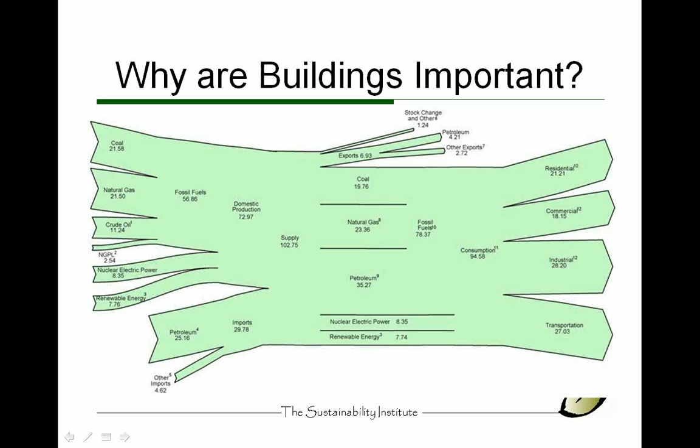So this screen here that you're looking at is how we use our energy in the United States. I'm going to bring it a little more local and talk about South Carolina.

You're probably not surprised to hear that South Carolina is one of the highest consumption of energy users in the entire U.S. We actually rank 17th in the nation for per capita energy use.

Now that means 33 other states in the Union are less wasteful than we are as South Carolinians. Now as South Carolinians, I mean that a North Carolinian uses less energy than you do.

So the idea is how can we effectively use that energy and redirect it into something that's a little more important. Ideally it would be our homes and families.

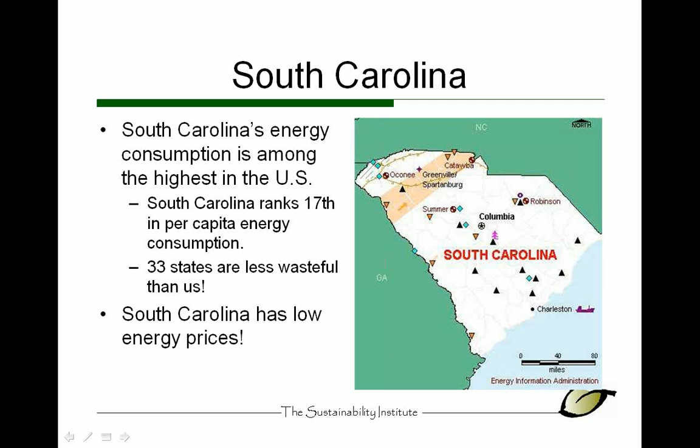Most people are surprised to hear that South Carolina actually has some of the lowest energy prices in the country. Think about it in your own home. How many of you feel like your energy bill is low? In truth, in South Carolina, our electricity costs are about a full cent lower than the national average.

What that means is if our local utility providers decided that they wanted to just bring our cost of energy to the national average, we could each add about $70 to our energy bill. So in South Carolina, we're on a precipice. We've got a couple of decisions that we should make now. We want to focus on energy now while it's cheap and easy, because if we wait, we may not have the money to invest.

This is one of those things that is a central theme in everything that our Sustainability Institute does.

Now I'm going to get on my soapbox here, and I typically don't stay on it for more than a few minutes. But one of the things we've been told is that there are 2 new nuclear reactors slated to come online in South Carolina by 2016. Now, I have a master's degree, and the only job I can get at a nuclear reactor is probably sweeping the floor. So one of the things we want to do is really jumpstart a green economy. And the idea is pretty simple.

If you give me the same amount of money and responsibility for the same number of households, I'll remove the need for the power plant. And I'll do it by putting hundreds and thousands of people back to work. Everyone from contractors who can do the work to realtors who can sell the work, to architects, engineers, all the people rolled up in selling and buying a home. There's a lot of money to be made, and there's a lot of progress to be made, specifically targeting the energy industry.

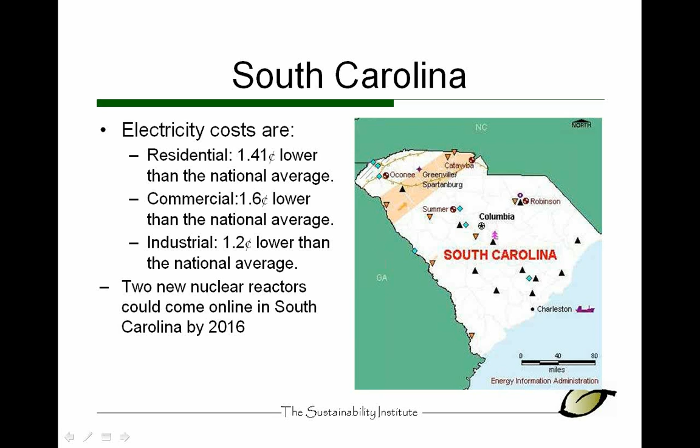So as we progress further, we've started with talking about the United States and how we use energy. We understand the situation that we're in in South Carolina, and I want to bring it home and maybe use your own home as an example here.

Now again, there's water heating and lighting and electronics and refrigeration. All of these are very important things, but you want to make sure you can maximize your budget. The idea is that no one has an unlimited budget. Incidentally, if you do find somebody with an unlimited budget, if you could give them my business card, I sure would appreciate it.

So in the grand scheme of things, when we target HVAC, we're not really targeting replacing HVAC systems. The idea behind this mantra is a house that is well sealed and well insulated is easier to heat and cool. And what I find is that a lot of homeowners don't target these improvements. They get swept under the rug because they don't truly appreciate how important they are.

So one of the things I'm going to talk to you today about is how do we create an infrastructure around those decisions? How do we make these decisions easier for the homeowner, and how can we help you if a homeowner asks you for these things?

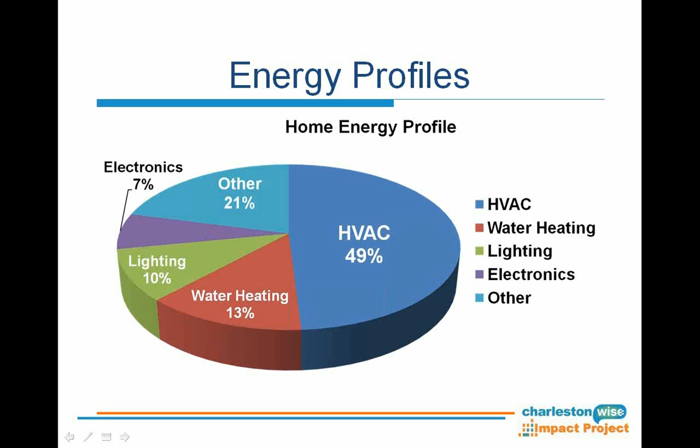We purchased the house from a family who was struggling. And so we bought the house and we realized what we had purchased. We had pretty much every problem imaginable.

Now, ideally, our customers wouldn't really be struggling with every single one of these, but we got the idea that we were going to take these problems, show the best opportunities for making these improvements, and then we turned this into our demonstration facility so that anyone who's struggling with any one of these problems can come to us. We can show them how to fix it and get them together with professionals that are specifically designed to help with those issues. So we're acting as a resource to the community.

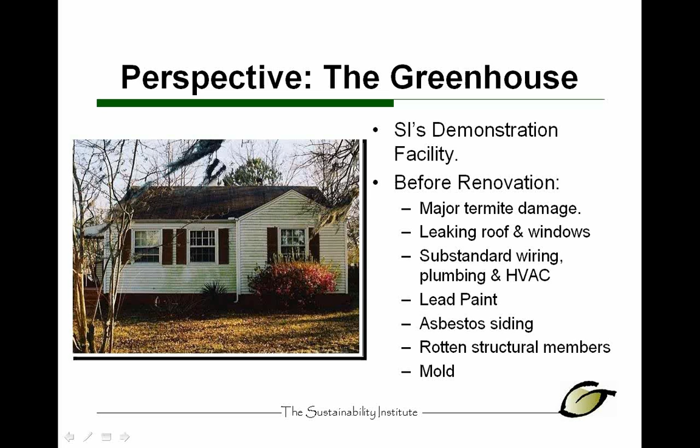Just as an aside, the house, as we finished with it, is not struggling with energy bills anymore. The family that lived there before us had energy bills around $270 a month, which I would love to be able to tell you is abnormal, especially for a house like this. This particular house is only 800 square feet, but because of those problems, that family was really hurting, and we needed to figure out a way to get the energy bills from what they were to what they are now.

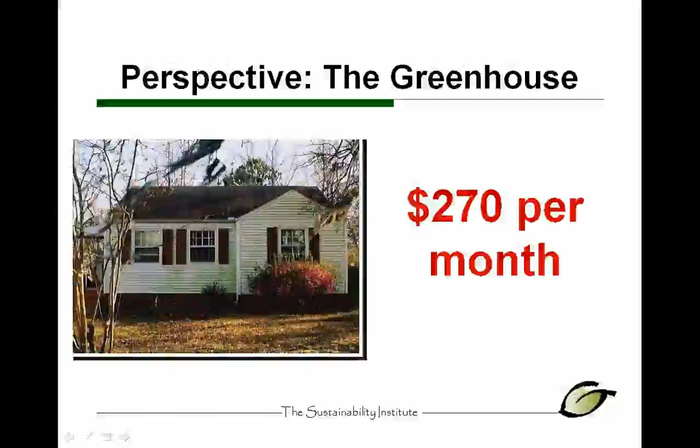As of 2003, we did a renovation, and that renovation, we had to create a scope of work that we could expect any contractor to achieve. Based on that scope of work, which is simple, cheap, and easy things, we were able to cut our energy bills and recreate the house to look a lot more manageable. Since that time, we've never had a bill over 70. So in the grand scheme of things, what we're talking about here is $200 a month worth of energy savings with a simple and practical renovation.

All we did was focus on what we call the building envelope, or the exterior shell. Now, the nice part about this process is it's a while-you're-in-there approach. In many cases, the clients that you're going to talk to, you're going to walk them through a house and you're going to show them the potential of that house.

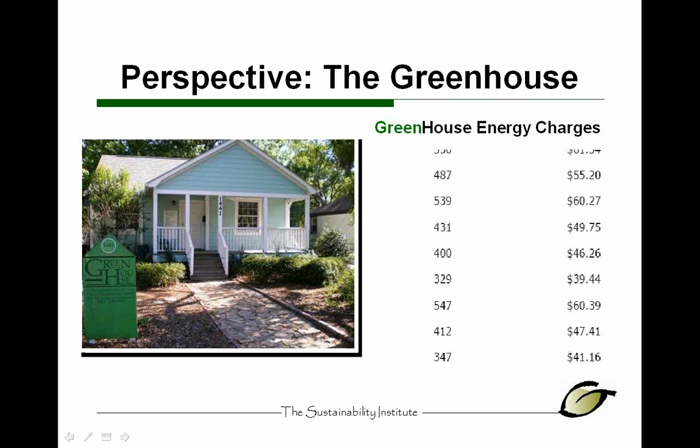You're going to know before anyone if they have plans to repaint the interior, to redo a kitchen, to redo a bathroom. One of the things that we want to be able to assist you with is, while they're in there, let's cut their energy bills in half. So I'll give you a couple of ideas about what we're talking about.

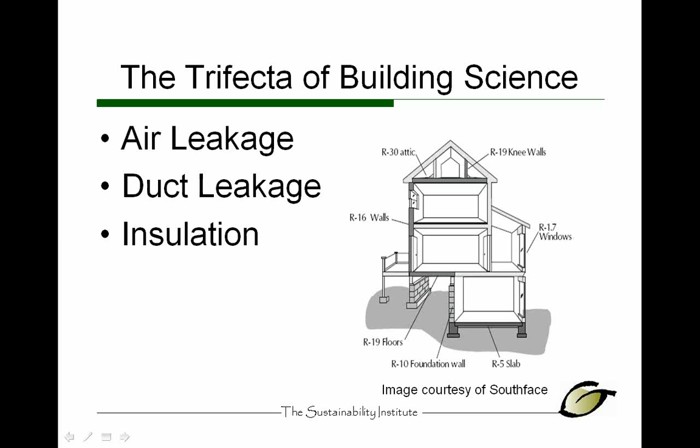As part of this process, we're really focused on what I call the trifecta of building science: air leakage, leakage in the ductwork, and insulation. All three of these things comprise how much money we're going to spend on heating and cooling. You add in whatever efficiency of HVAC system you want, but ultimately the amount of heat that's lost from the house is going to be equal to the amount of energy that you're going to expend trying to keep the occupants comfortable.

One of the things that we're targeting is the attic hatch. One of the things that we think about when we talk about air sealing is, where are the large holes? This is one of those locations that is undoubtedly the largest hole in any house, specifically because it goes unnoticed. It's not perceived as a hole, it's a door. Every house that I go into, this particular attic hatch is a pull-down stair, and I typically find it in a central hallway. Usually when I look up at it, there's a little gap where that string is that is open to the attic. So one of the problems is, let's consider where this is located.

If this is located in a central hallway, what else is located in that central hallway? More often than not, you find a central return, and right over top of that central return is a thermostat. So it's actually a misnomer that heat rises. Heat will actually flow in any direction. The direction that it's going to flow is from the hot areas to the cold areas.

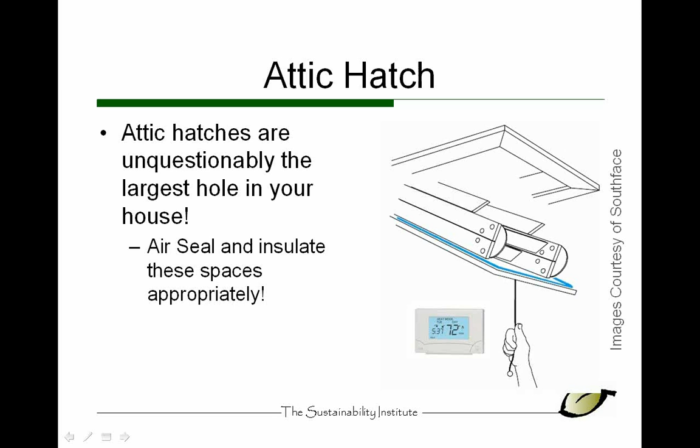If it's 150 degrees in a Charleston attic, that heat's going to want to flow down. And if that attic hatch is not air sealed and insulated, it's going to flow down through that attic hatch at much greater rates. Then what's going to happen is that heat's going to come into contact with the thermostat and trick it into activating unnecessarily. So even though the rest of the house may be perfectly comfortable, because there's a lot of leakage through that attic hatch, your energy bills go up. So it's as simple as air sealing, and in this case we're just talking about some simple weather stripping. But on top of that, you can very easily create a cover box that goes along with this.

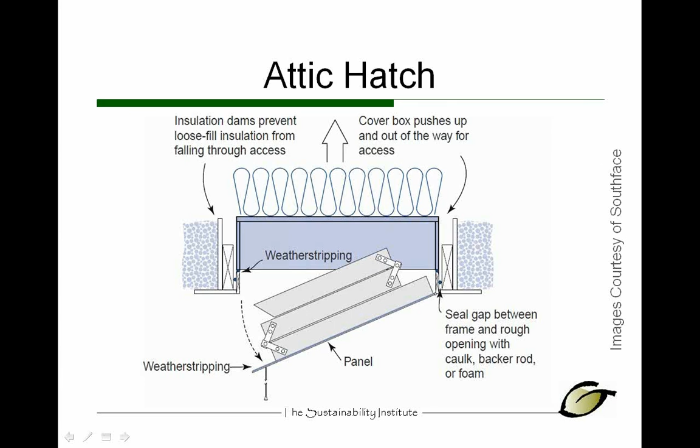By insulating and air sealing that, it's one of the quickest and easiest ways to drop your energy bills, and it's directly related to how much your energy bill will be associated with HVAC systems. You can do this simply by creating a cover box. What I recommend is hiring a contractor, but a handy homeowner could make this happen in a short period of time.

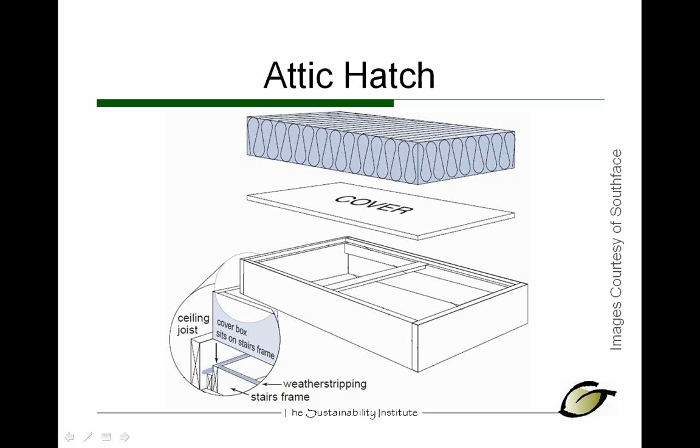Go to Lowe's or Home Depot and buy all the materials you need for about $40. You can also buy these online—they're usually called attic tents or attic cover boxes, and you can get them for about $125. The same thing can happen with a scuttle hole, the attic hatch you just push up and out of the way. It's as simple as air sealing and insulation.

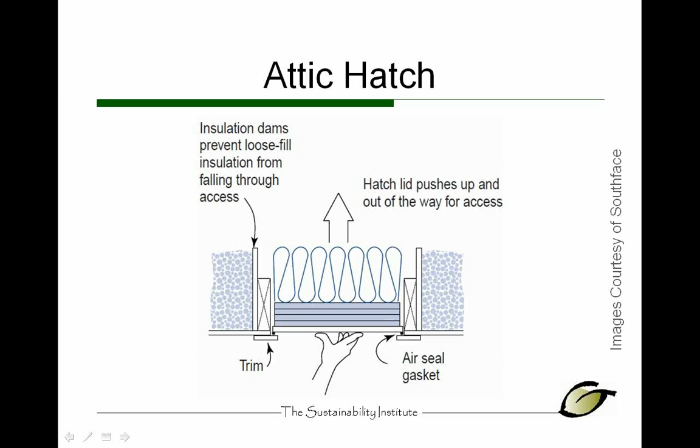What you're trying to do is protect that thermostat from activating unnecessarily. This is one of the largest problems we find in homes, and it has a very simple and cheap solution. Another one we find a lot is recessed lighting.

There's been a great call for recessed lighting in homes over the last 15 years. They're pretty, and as a result homeowners often install them, and I can't argue with the fact that they're pretty, because they are. We have them in this room right now. One of the things we need to consider with recessed lighting is how much air leaks in through it into the house.

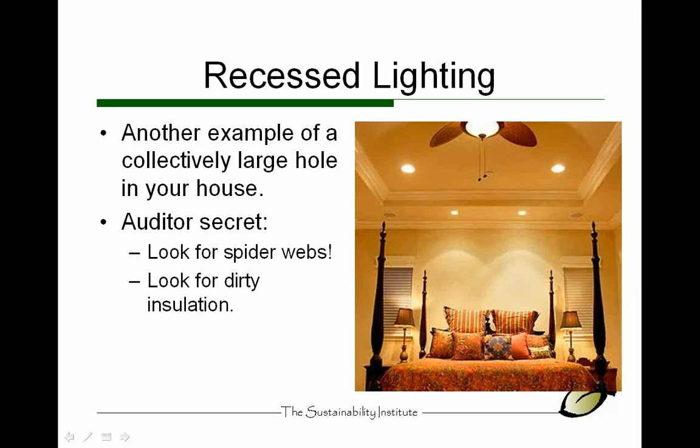Those great big holes, unfortunately, will allow a lot of hot attic air to intrude into the building. We were working on a house recently, in the past couple of months, that had 16 of these in the kitchen. Strangely enough, the kitchen was 6 or 7 degrees hotter than the rest of the house, and this was the primary culprit. It's a fairly simple and easy thing to fix.

Now, it's not just air sealing. Because this bulb can get so hot, the code doesn't allow you to install insulation right up against it. So for every single one of these recessed lights, or can lights, within a foot in each direction there's no insulation, and it's wide open for air leakage.

I'll teach you a little auditor secret. As you're going through these houses looking for potential improvements, look for spider webs. This is a biological fact—spiders will only build webs where air is flowing. So if you look up at a recessed light and see spider webs, you know that's a great source of leakage for that home.

There are really easy solutions here. Typically a contractor will have two choices: you can either build a box to cover that recessed can light, air seal the box, and then put insulation right on top, or you can just install a brand new one. The new one will cost somewhere between $15 and $20, but what you can get is what's called an air-sealed and IC-rated can light. IC stands for insulation contact, meaning you can just pile insulation right on top of it.

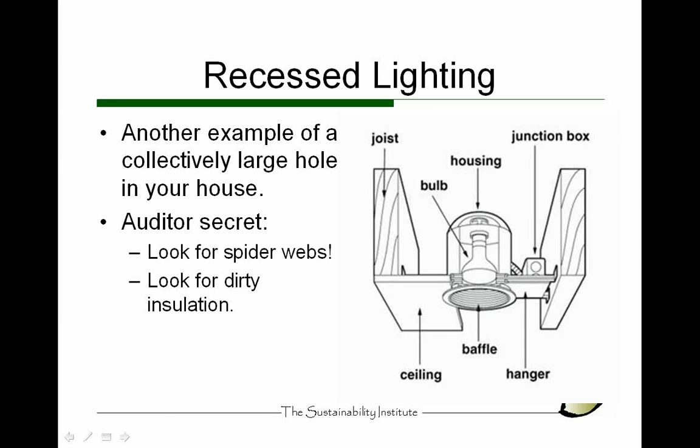One of the things we include as part of our new programs is an energy assessment. In the past they've been called audits, but people don't like the word audit, especially around April. So we've changed it to something a little more warm and fuzzy, calling it an energy assessment.

A professional energy auditor is going to use something called a blower door. For any home you'd classify as drafty, this piece of equipment puts a number value to the draftiness of the house. It measures how leaky a house is.

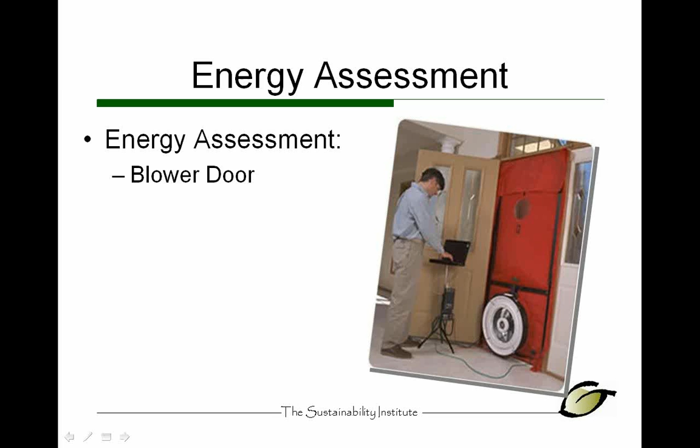The idea is simple: the more leakiness you can get rid of, the more efficient the house will be. This equipment is used by auditors and contractors to seal houses as tight as possible and reduce energy bills, doing it in a scientific and scheduled fashion to provide safety to people and property while dropping those energy bills.

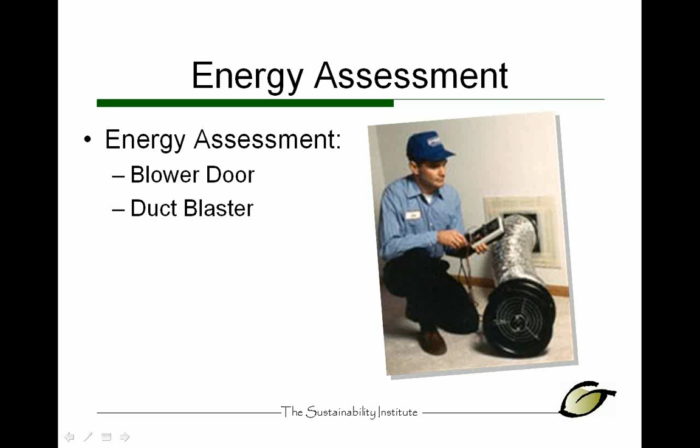Another piece of equipment is called a duct blaster. Anybody struggling in their own home with one room that always seems hotter or colder, or can't seem to keep certain rooms comfortable, in many cases that's related to duct leakage. This duct blaster measures duct leakage and allows the contractor to find it very quickly and fix it. So what would have been a 2-day job can very easily turn into a 2-hour job. It's quick and it's easy.

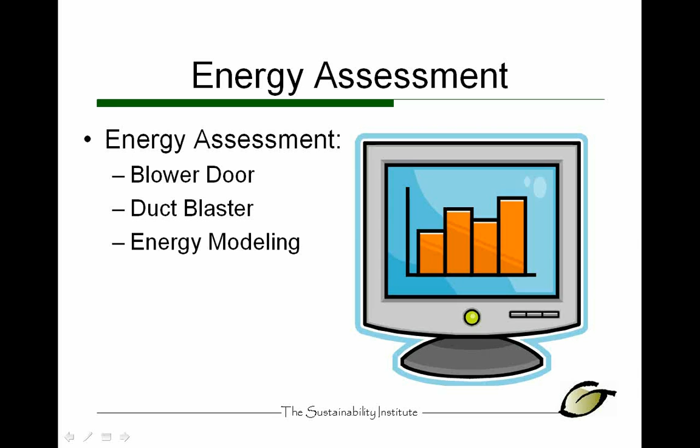Your professional energy auditor will also perform energy modeling, a computer program that predicts energy use. From that, they can measure how much energy will be saved by any particular improvement and the likely cost of that improvement, giving the homeowner a cost-benefit analysis. Since we don't have an unlimited budget, this lets us determine the best use of our money when focused on energy efficiency.

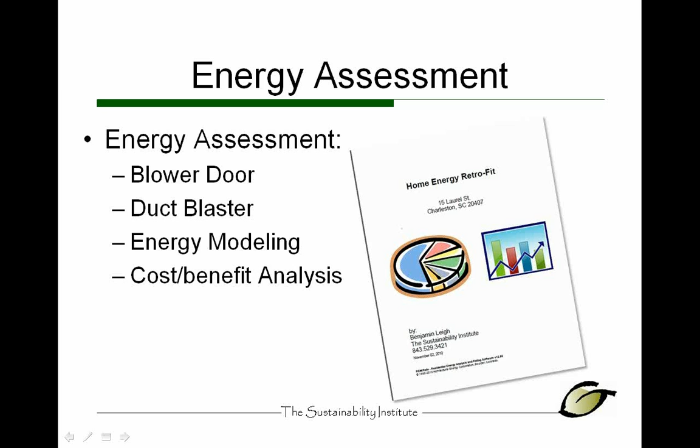The next thing they can do is provide a scope of work to a contractor. In real estate, agents have probably talked with contractors a fair amount, and we in the building industry speak a little different language. This takes the cost-benefit analysis and turns it into contractor speak, so the contractor shall make this happen, and as a result we can guarantee those energy savings.

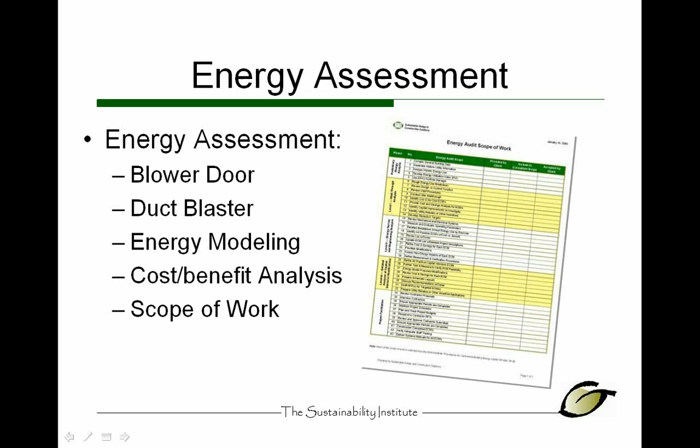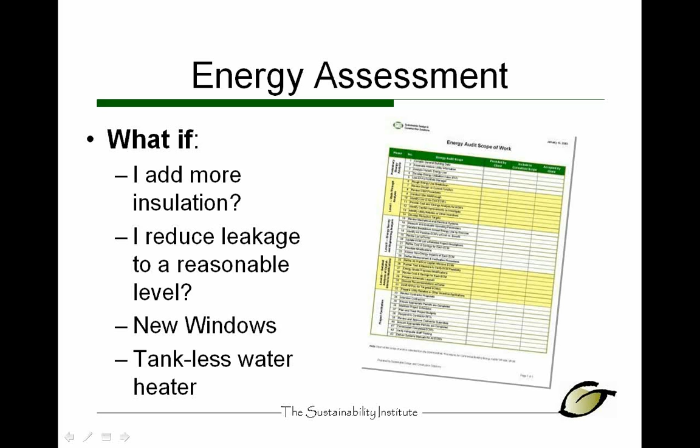From all that, we have the ability to answer any what-if question. What would happen if I added more insulation? Or reduced the leakage in the house to a reasonable level? Or put in new windows or a tankless water heater? We'll know in advance how much money you can save, how much it's going to cost, and as a result, what to invest in. That's really the whole point of the energy assessment.

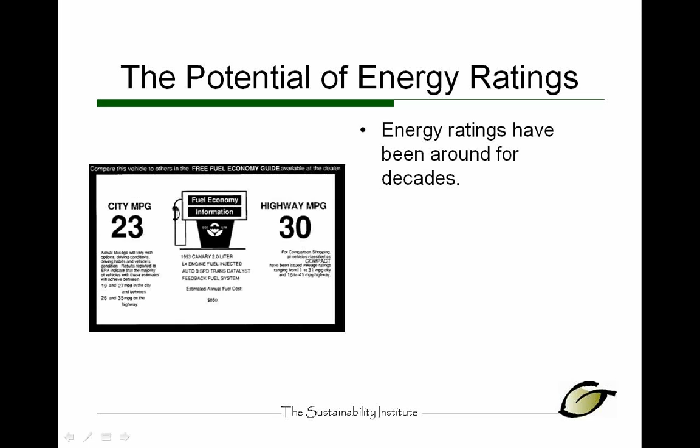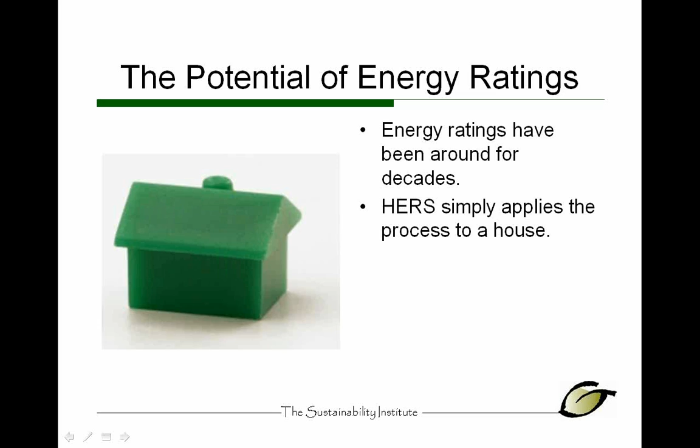These assessments have been around for decades. One you're probably most familiar with is the miles per gallon rating for your car, which we're targeting pretty heavily now in the automotive industry. The only difference with the energy rating is instead of focusing on a car, we put it on a house. Our Home Energy Rating System, that's what HERS stands for, applies that process to a house.

I want you to know how much potential this may have. In the European Union, they've mandated these ratings on every single house sold, constructed, or rented, and they did that about 5 years ago. I'll go on record saying the United States is probably never going to make that happen, but it's important to know the nice part about our country is we have the ability to make money off of something like this.

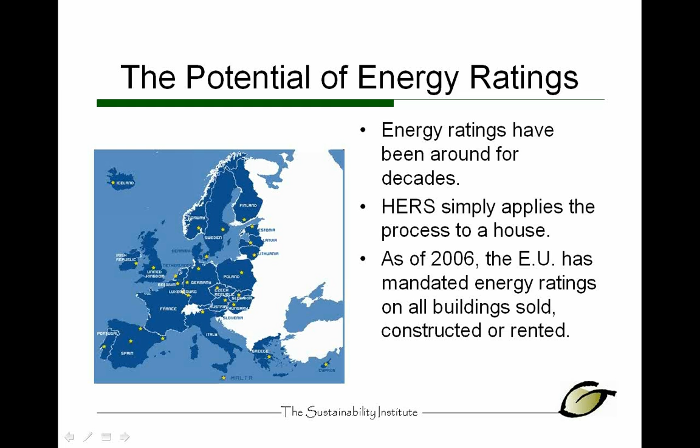Specifically, if you have a homeowner targeting energy efficiency, we want to offer an infrastructure that supports you so your customer can be happy. I'll show you some examples of that. We've probably all seen green building standards before, like the idea of Energy Star, which has been around almost 30 years now. Energy Star is the granddaddy of them all.

Earthcraft House is another local, regional green building program. The National Association of Home Builders also has one. And the pinnacle of green building is really LEED, Leadership in Energy and Environmental Design. They have one that's associated with residential construction.

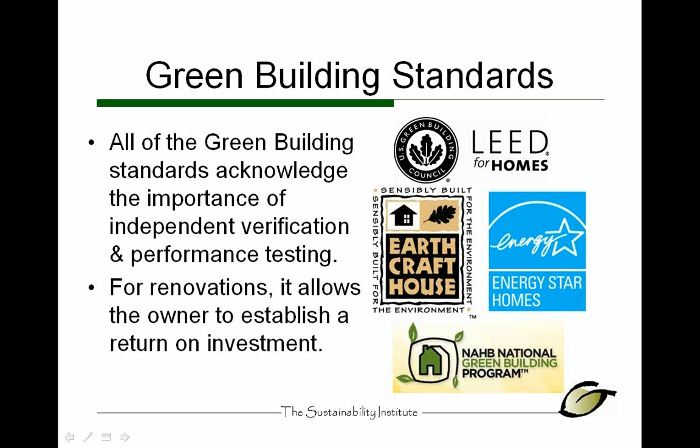Now, the problem we find is that these are all relative to new construction. What do we have to do for existing construction? What can you do to prove that an existing home is just as energy efficient as a brand new home? The idea behind that is pretty simple, and it's one that you already have access to.

MLS Listings. Now, I was talking with the staff here, and I understand that you guys currently have an MLS system that allows you to include what's called the HERS index score in your MLS listing.

To put things in perspective, the HERS index is a relative energy use scale. It puts a number to how efficient the home is. A home that receives a 100 is basically what you can expect from a standard house built to code. Anything lower than 100 means it's more efficient than code.

From a sales standpoint, I can take a home that was built in 1885 and have it compete with a home that was built yesterday to a green building standard. The difference is this HERS index will help you prove it. So if you have the opportunity to include a HERS index in your MLS listing, my advice is to do so, because it will help you compete existing construction with new construction.

Now, as part of that HERS index, one of the things you will need to do is consult with an energy auditor. As the Sustainability Institute, we work with a network of these individuals. So if you need a HERS index on any house, come to us and we'll hook you up with any HERS rater that can help you with those services.